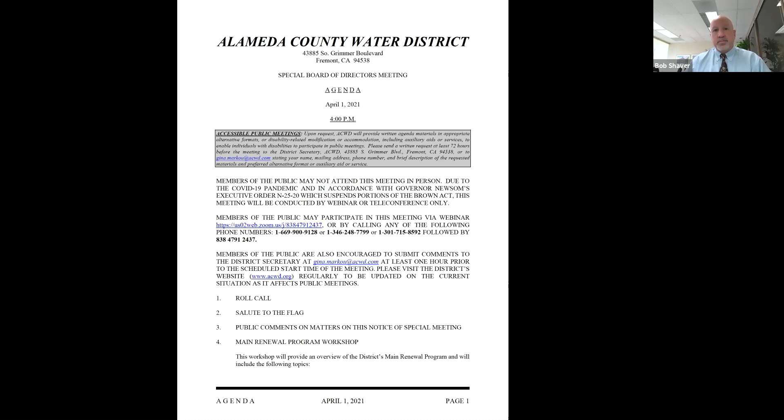Okay, thank you, Mr. Stevenson. And we can dig deeper into this particular topic when we get to those points if needed. Great. Thank you for the question. And thank you to Director Sethi, Mr. Stevenson, and Mr. Shaver for the response. Let me see if there are any other members of the public who wish to make a comment before we move on. Hearing none, I think we can close our public comments and we'll move on to item number 4.

Item number 4 is our main renewal program workshop. This workshop will provide an overview of the district's main renewal program and will include the following topics: an overview of prior analyses of the condition of the water distribution system and recommended improvements, an overview of the process used to prioritize and program main renewal projects into the capital improvement program, a review of programmed and completed water main renewal projects, findings from a survey of Bay Area agencies and their main renewal programs, and a proposed approach towards further progress on the district's main renewal program.

And with that, I will turn it over, I think, to Mr. Shaver or Mr. Stevenson. I'd like to say a couple of things before turning it over to Mr. Stevenson. Number one, I think staff has put together a presentation that should take maybe a little longer than an hour, but I think the board will find it interesting and comprehensive. And I hope you enjoy it and find it informative. And with that, I will turn it over to Mr. Stevenson.

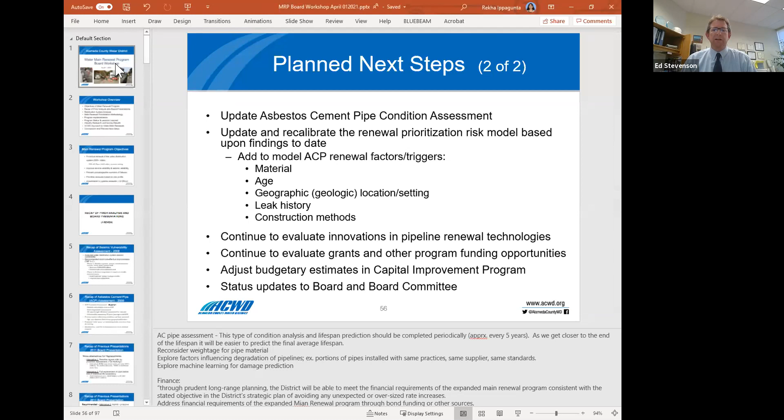So with that, I'd like to introduce Rekha Ippagunta, who is the district's Project Engineering Division Manager. And Rekha will help step us through these topics. And so Rekha, while you're sharing your screen, I will just also note for the board and for the public that the presentation slides that we'll show here this afternoon are posted on the district's website with the agenda for this workshop. Now, there's a lot of material in the presentation, and a lot of that is review, and it's details about projects that are currently underway that the board may already be familiar with. And so Ms. Ippagunta's plan is to only very briefly touch on those topics in order to focus more on the future of the program. But that said, we'd be very happy to go into any detail desired on any of the topics if there are questions from the board or from the public. So with that, I will turn it over to Ms. Ippagunta.

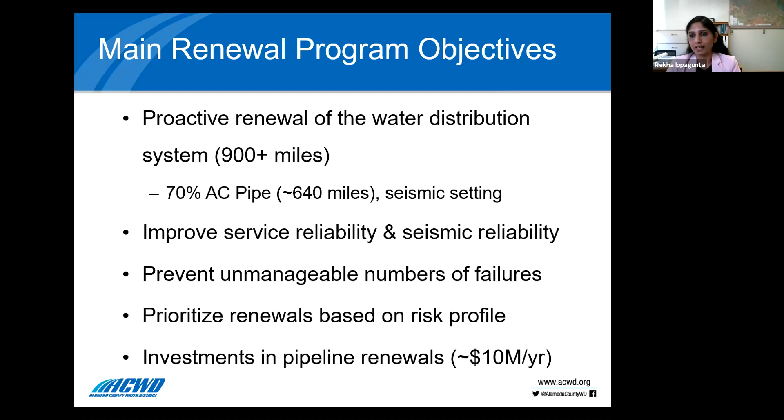So in order to renew and replace 900 miles of pipeline, the core objective of the program is we need a proactive renewal model for replacing or renewing these water distribution mains. And the program would also focus on improving service reliability and seismic reliability. Additional objectives of the program are to prevent an unmanageable number of failures in the future, and the prioritization of the program is based on the risk profile of the pipelines in our distribution system. Currently, we have an objective of $10 million to invest on pipeline renewals. So in the next few slides, I'll go through very briefly the previous analysis that was conducted and the recommendations made to the board.

So back in 2008, the district conducted seismic vulnerability assessments that included all facilities, both production and distribution facilities operated by the district, but I'm only touching on the distribution system analysis and some of the key findings from that report. So the report identified some cost-effective approaches to stabilizing the system and ensuring critical customer service. Those were recommended in 2 phases.

Phase 1 is complete. Most of the fault line crossings have been completed under the phase 1 approach of this report. The project is complete now with multiple fault line crossings within the distribution system. And phase 2 actually focused on the backbone piping in different corridors of the system. And also the report identified the need for a long-term plan for these main renewal projects.

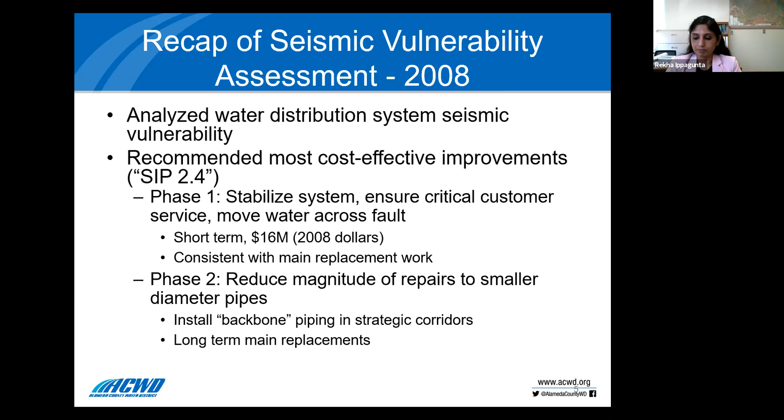And then following the seismic assessments, the district also conducted an asbestos cement pipe assessment in 2009. Exponent was contracted to complete the assessment. They collected samples of our asbestos cement pipe within the distribution system and analyzed and tested them. One of the major reasons the analysis was conducted at that time was to find out the estimated life expectancy of asbestos cement pipe, and also understand the remaining useful life, so that information will help us plan for our program.

Some of the key findings from that report: the pipe strength was still above the requirement for a new pipe per ASTM standards. Some degradation has occurred, but not a lot. And the main outcome was that the life expectancy was estimated to be 75 years for AC pipes. The report also identified other factors that influence the condition and the leak rate of the pipe segments within the system. And the analysis projected an echo wave of failures over time if we do nothing with the existing pipes. Again, this report also identified a need for a comprehensive main renewal program.

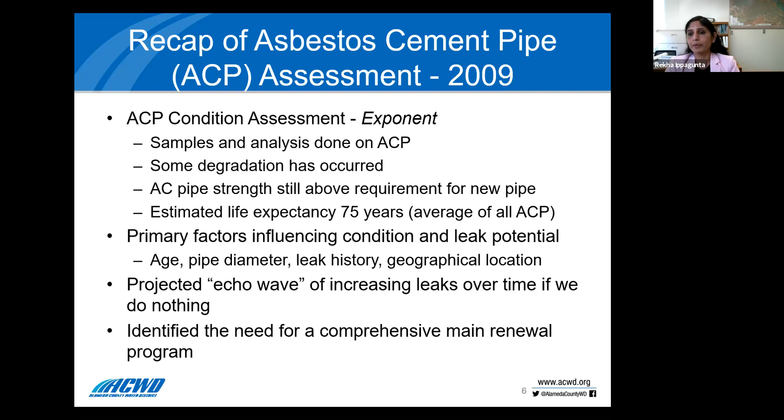Taking those recommendations from the analysis, staff worked on putting together a main renewal program for the district back in 2011. Staff conducted the analysis and came up with 3 alternatives to establish a program for the district. Alternative 1 was reactive repairs, which is basically relying on the repairs and doing nothing. Alternative 2 was on the other end of the spectrum, full replacement of pipeline at the end of statistical life expectancy. Staff recommended a hybrid approach that's a combination of proactive replacements and reactive repairs.

So based on the model recommended in 2011, the objective of the program is to invest $10 million per year. And based on this model, all the AC pipe in the system will be replaced by 2090. In 2014, staff established a main prioritization model for the district to identify the right candidates to focus on as part of the program. As part of that evaluation, we identified about 20 miles of pipeline considered high priority at that time, and then packaged them into projects.

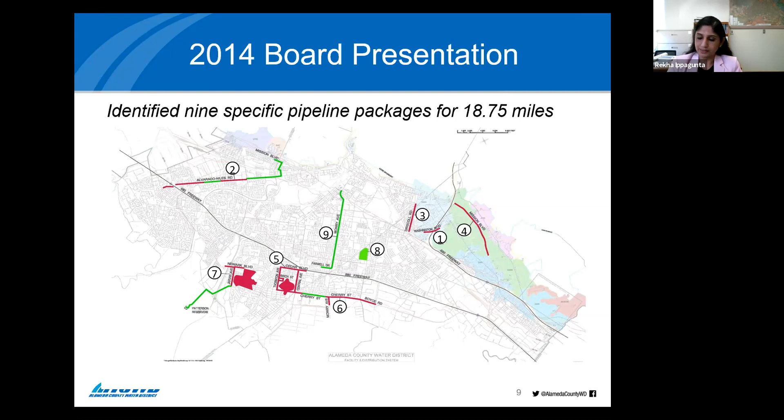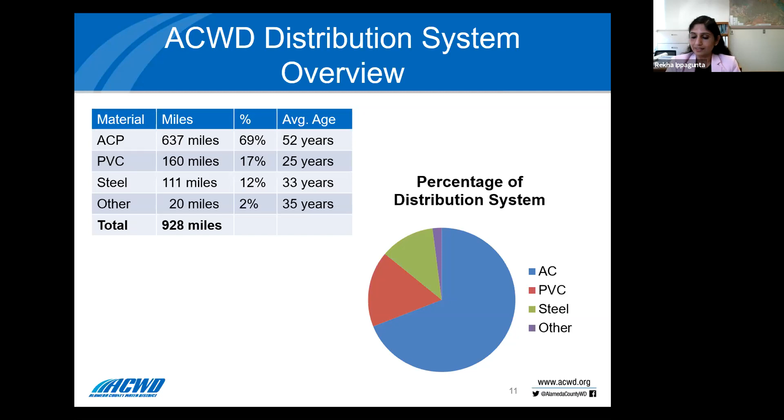So with that background, I will go into the distribution system analysis. Again, this analysis is based on recent information of our distribution system that connects back to what was done 10 years ago. This chart depicts our distribution system. About 2/3 of our system is AC pipe material. The average age of the AC pipe is over 50 years, and the design life is anywhere between 80 to 105 years. AC pipes represent the majority of the pipe leaks in our distribution system. Out of 300 recent pipe failures between 2011 and 2020, 77% were on AC pipes. So the continued focus on AC pipe renewal is appropriate.

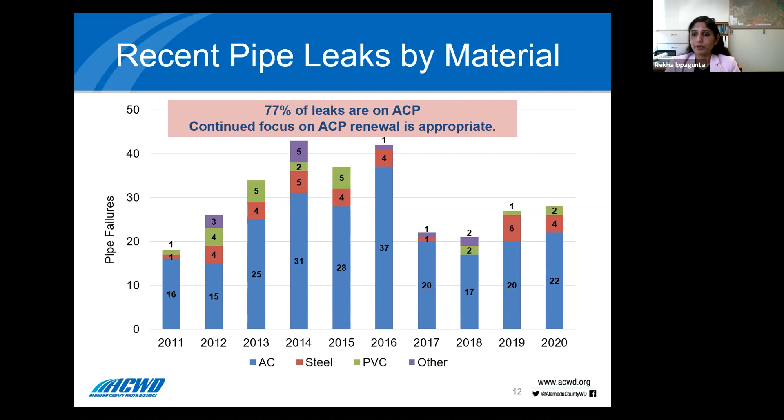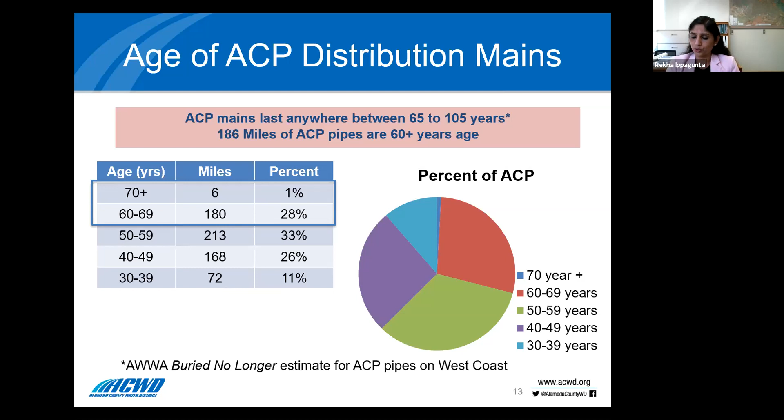So although age is a factor, what we have noticed from this is there are pipelines in certain locations that are younger, in the 40 to 49 years group, that have registered more leaks than the pipes in the 50 to 59 age group. So age is not the only factor, it's only one factor. There are other factors that play a part in the leaking and breaking of pipelines.

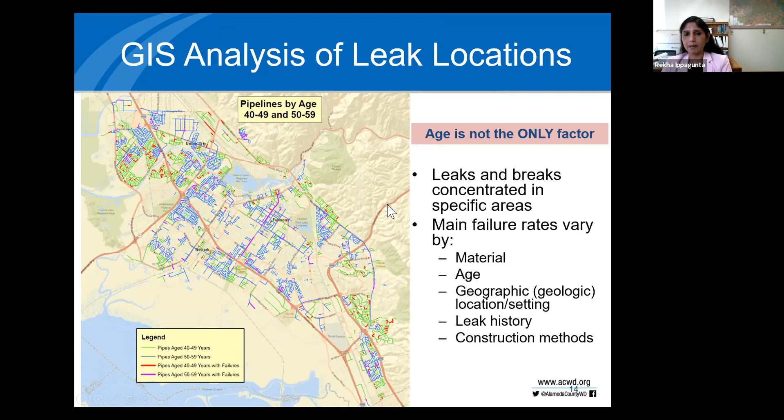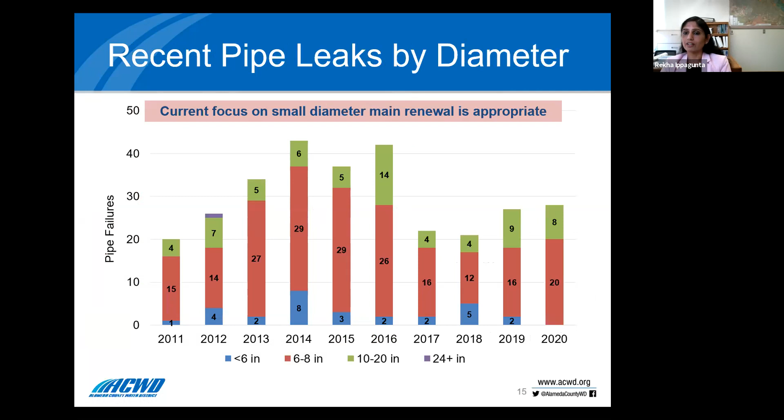So pipelines with a diameter less than 10 inches represent the majority of the pipeline leaks across recent years. This is only showing the information from 2011 to 2020. So the current focus on small diameter main renewal is appropriate.

If there are no leaks registered or recorded, then those pipeline segments were considered in good condition. So based on that evaluation, 92% of the pipelines have no leaks to date.

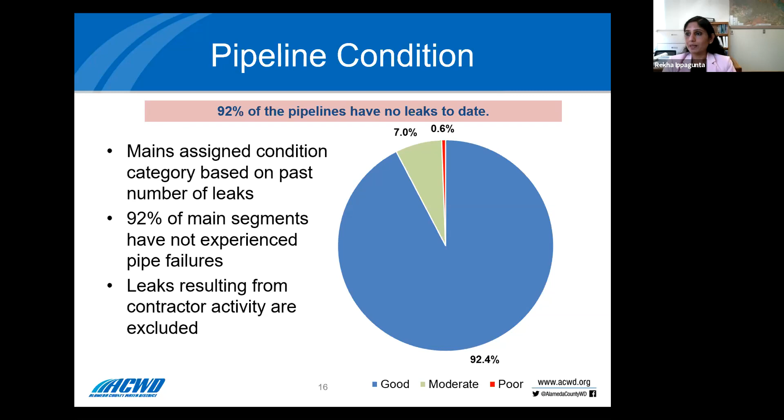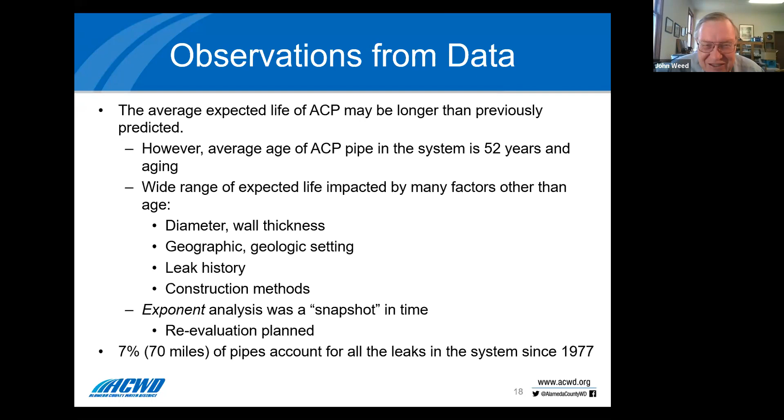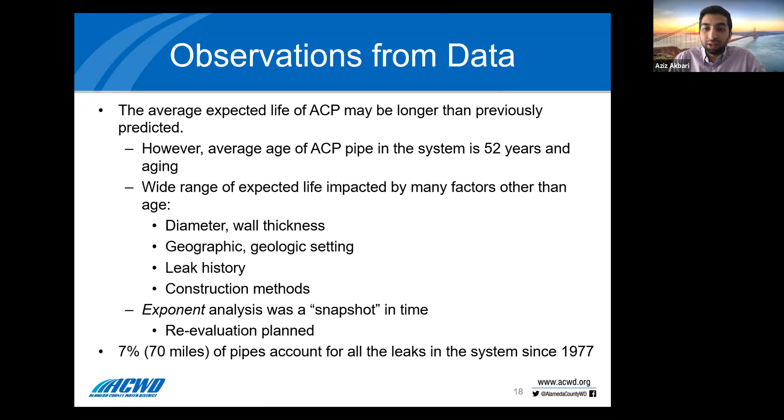All right. Thank you. Do you have any additional questions, Director Weed? I have a bunch of comments, but let us finish the report, and then I'll come back to the longer list. Okay. So please go ahead. I don't want to interrupt you. Any other directors have questions? If not, are there any members of the public who wish to ask a question at this point? Hearing none. Rekha, I'll turn it back to you and we can continue.

Okay, thank you. So let's move on to the next section, which is our risk-based approach to prioritizing our main renewals. And again, I'll go through this very briefly. The board has seen this information in the past. If there are questions, I'll pause and answer those questions.

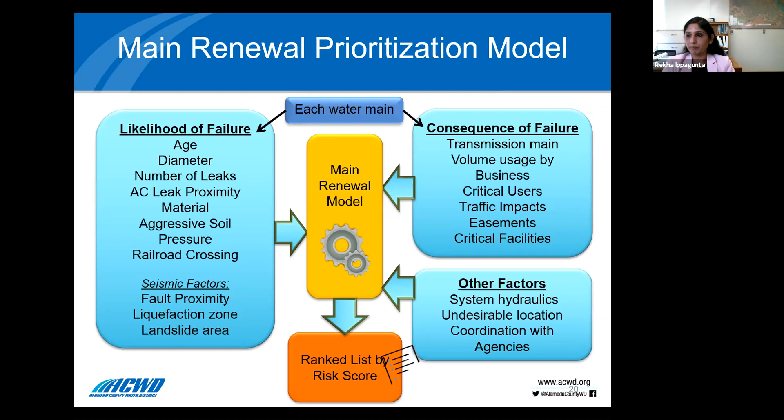So we go through the prioritization or ranking of our pipelines and the selection of the pipelines for appropriate renewals in a three-step process. So the first step is we take all the segments in our distribution system that are on our GIS and then rank them based on relative risk. So each segment of pipeline is evaluated for likelihood of failure, consequence of failure, and other seismic factors that include fault proximity, liquefaction, and landslide. So once all these factors are applied at different weightage, we have a ranked list of all the pipeline segments in our distribution system.

And in the second step, we run our hydraulic model to understand any capacity constraints within the system, and the pipelines that exhibit some sort of capacity constraints or low pressure issues or any other concerns would be identified and then added to our complete list of ranked pipeline segments. And then once we identify the top 1% of pipelines that are ranked based on likelihood of failure and consequence of failure and other factors, those are mapped on a plot, and then we look for potential projects by consolidating different pipe segments into projects.

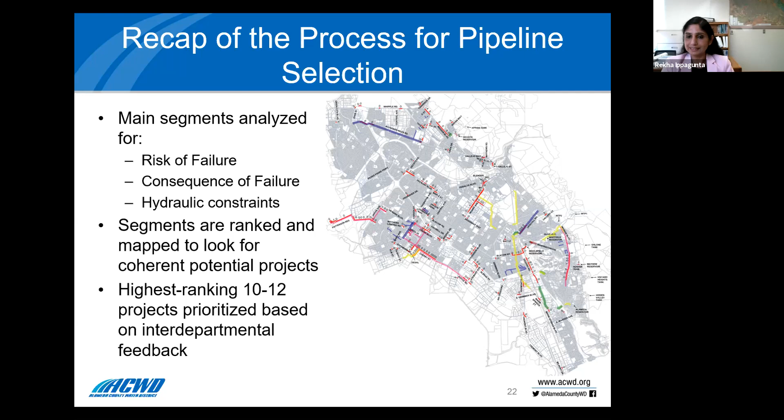So once we have these projects, we'll take the top 10 or 12 projects and then have an interdepartmental meeting and receive interdepartmental feedback and apply our institutional knowledge, and then identify top projects that we should be focusing on, and we'll incorporate that into our CIP process. So that's pretty much the selection of the pipelines and identifying the right projects to focus on. And then once the right projects are identified, we'll go through the detailed design, permitting, bidding, and construction, just like any other CIP project.

So we also have a number of tools in our toolbox for renewal of these mains. Some of them are identified here. Slip lining an existing main is one option, or we can replace in the same trench or replace in a separate trench, and also cured in place lining is another option. So once the pipelines are selected, we'll evaluate the needs of those pipelines and then apply the right tool for replacement or renewal.

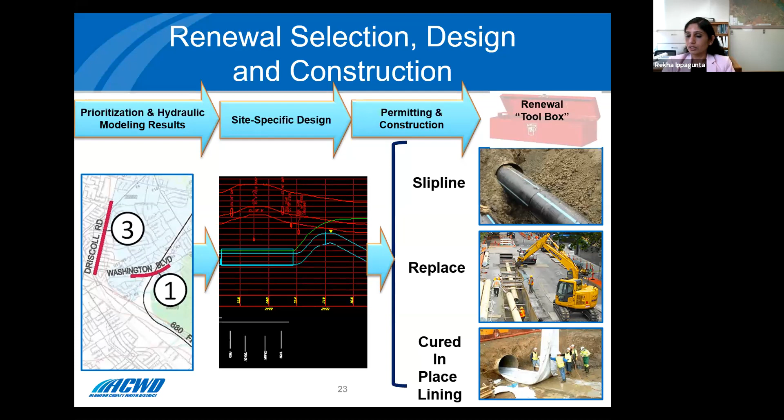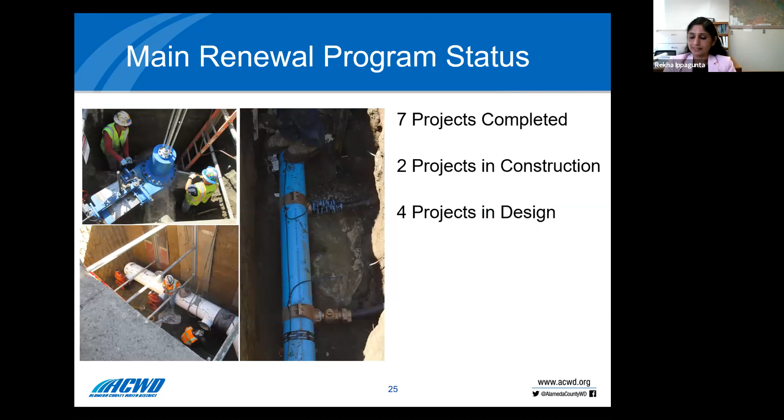So the next few slides focus on the implementation status. I'll quickly go through the projects that were completed and that are currently in progress. The board has seen this information a few times before, so I will be briefly touching on some of these projects. But feel free to stop me if you have any questions. So far, we have completed 7 projects since we initiated this main renewal program. And currently we have 2 projects in construction. One is a seismic improvement project and one is a small diameter main renewal. And we do have several projects in design. So this is a long list of completed projects. The key takeaway here is we have completed about 5.5 miles of pipeline so far.

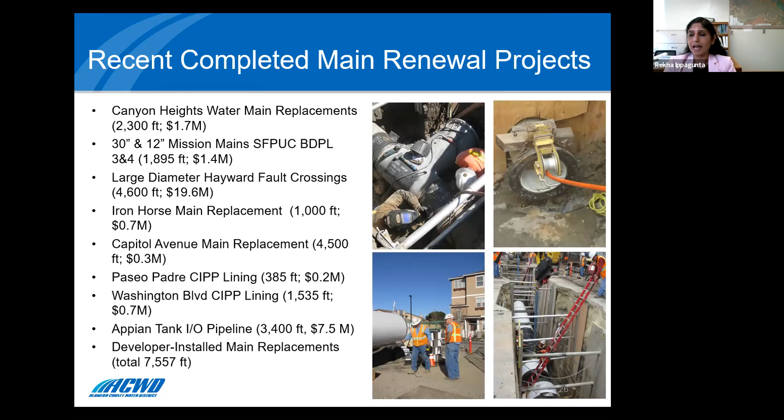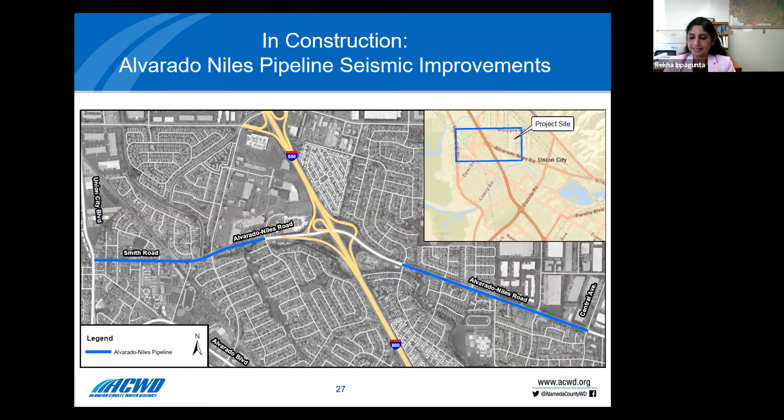And this is the Alvarado Niles seismic improvement project. Phase 1 is currently in construction. The board is very well aware of the project that is currently in construction, and we also have a second phase of the project that is currently in design. Phase 1 is on the west side of 880, so on Smith Road, and Alvarado Niles is the one that is currently in construction. It's 1.7 miles of pipeline. This includes not just the main trunk main installation, it also includes services, fire hydrants, and a complete renewal of our water system in that area, including installation of a cathodic protection system. And also we have about 21 connections that we'll be making to our existing water system.

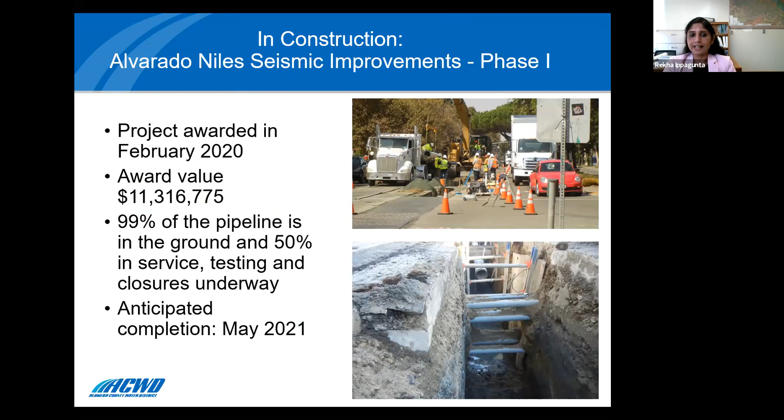So this is an $11.3 million construction contract. 99% of the pipeline is in ground, and about 50% of the pipeline is already in service. The project is anticipated to be complete by end of May 2021.

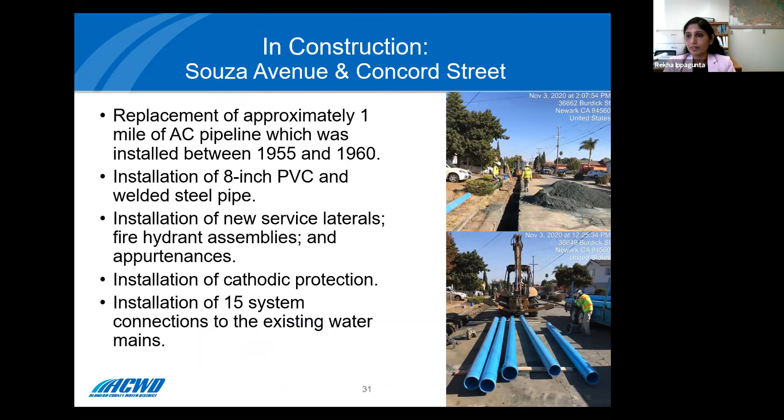This is another project that is in construction right now. This is a small diameter main renewal project in Newark, in a residential area on Concord Street and Souza Avenue. This is about 1 mile of pipeline renewal of 8-inch PVC. And this again includes installation of the main as well as service laterals, fire hydrants, and valves and appurtenances. The project was awarded in May 2020, and this is a $3.2 million contract. 50% of the pipeline is in ground. We encountered some unforeseen conditions during construction. The project is anticipated to resume construction next week, and it's expected to be complete by June 2021.

And Alvarado Niles phase 2. Phase 1 is the one that is currently in construction. We also have phase 2 currently in design. This has some special considerations in addition to what we have in phase 1, which include a creek crossing and a railroad crossing. The construction estimate of this project is going to be slightly higher than phase 1. It's estimated to be a $17 million construction project, and construction is scheduled for 22-23.

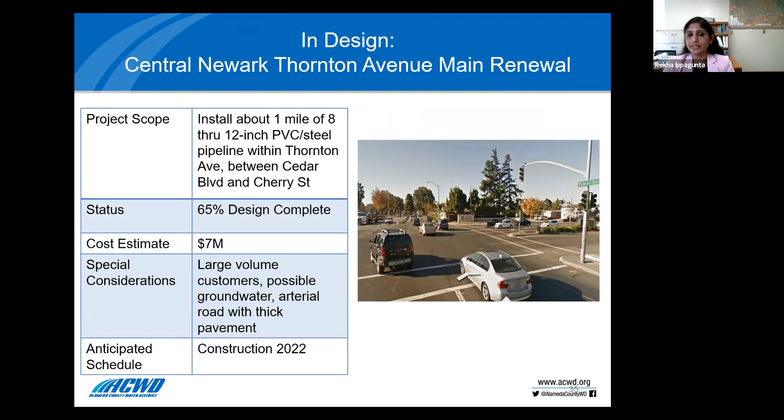And another project that's currently in design, about 65% design complete. This is Central Newark, Thornton Avenue main replacement. This is phase 1 of the project, and phase 2 is included in our CIP.

And we also have a small diameter main renewal project that includes multiple pipeline segments in the 3 cities. Currently, the project segments in the City of Fremont that add up to about 3 miles of pipeline are on hold because of certain requirements from the City of Fremont related to removing the pipes from the ground after removing them from service. So we have been in discussions with the city.

Once we resolve those permitting requirements related to AC pipe removal, we'll resume the design on the City of Fremont pipe segments. However, Newark and Union City pipe segments are continuing, and the design is currently at 65%. And we also have additional projects that we are collaborating with the City of Newark on, a couple of small diameter pipeline segments.

So with that, I'd like to touch on what we have learned so far in the implementation of this program. Rekha, can I just jump in and see if there's any questions? Yes, of course. Are there any directors who have questions?

I'd just like to make a quick comment. Living as close as I do to the Alvarado pipeline, we have dodged a huge bullet because of the school closures. However, the schools are most likely going to open back up someday. I see Fremont is looking to not do it till this fall. But looking at the projects, we're going to have Driscoll and most likely Alvarado Niles in process at the same time.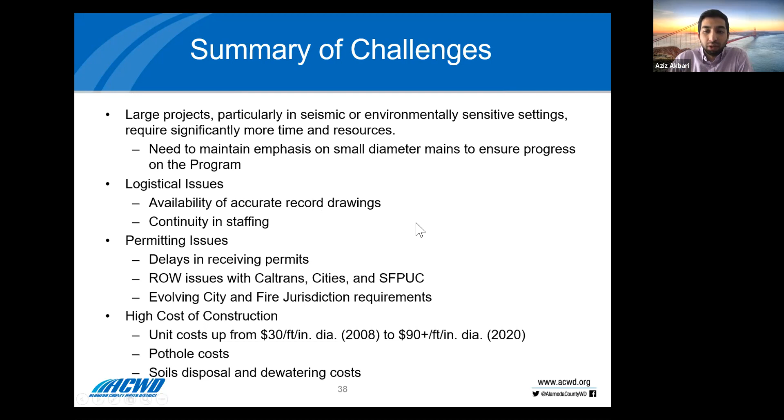Thank you, Director Gunther. I actually had one question on slide 32, which was Souza Avenue and Concord Street. I believe you made a comment that sounded like maybe the project ran into some issues and was on hold currently and will be picked up again next week. Can you just expand on what issues we ran into and what lessons we learned to try and avoid that situation next time? Yes, actually, this is sometime late January.

We have encountered groundwater, and actually the potholing that was done during design, and also the potholing that was done before starting construction by the contractor, didn't reveal that information, because at that time the design was based on a shallow depth pipeline, which is less than 5 feet deep. So groundwater was not identified as an issue during design or when we started construction.

But because of some unforeseen conflicts, pipe conflicts with other utilities, we had to redesign certain segments on the fly. So the redesign required us to go deeper than 5 feet, the originally anticipated depth. So now we had to go about 7 feet deep, and that's when the contractors encountered groundwater issues. So the project was stopped at that time for those pipeline segments.

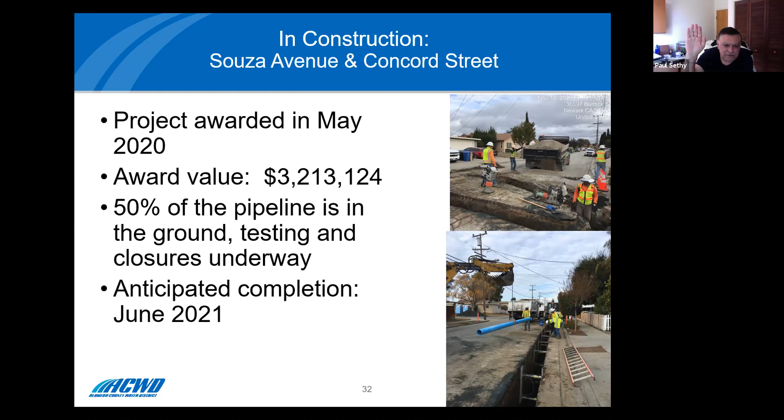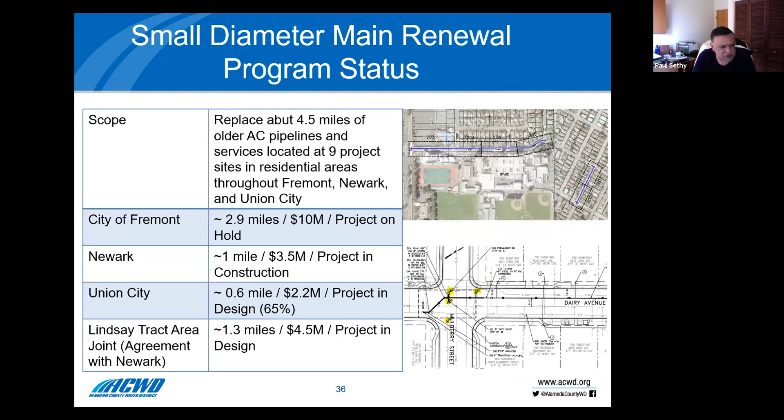Got it. Okay, thank you. Director Sethy here. Yes. So back to the slide that you were on with costs there. I think it was slide 30, yeah, 38. There we go. So I just want to offer a little bit of feedback here. I appreciate all the work that staff is doing, all the continuing work that we've done on projects, but I just want to offer a little bit of a retrospective here.

If we go back a dozen years, we were looking at the unit costs that you mentioned here, and now it's tripled from that level. We, in my opinion, arbitrarily chose a number as a board based on input from staff that we were going to try to complete $10 million a year of pipeline renewal, which amounted to 5 to 10 miles of pipeline every year. But that goes back a decade ago. Now we're dealing with a different cost metric in our universe. And I don't know whether we're being realistic about the future financing costs of the projects that we have in our pipeline. Sorry, pardon the pun there.

And I'm also going to be a little bit critical of staff here because we as directors are responsible for setting the rates for our customers. And we dramatically increased our rates 4 years ago in anticipation of doing a lot of main renewal work. And what has happened is that if you look at our reserves, we're building up tens of millions of dollars in reserves because we're not getting sufficient work done.

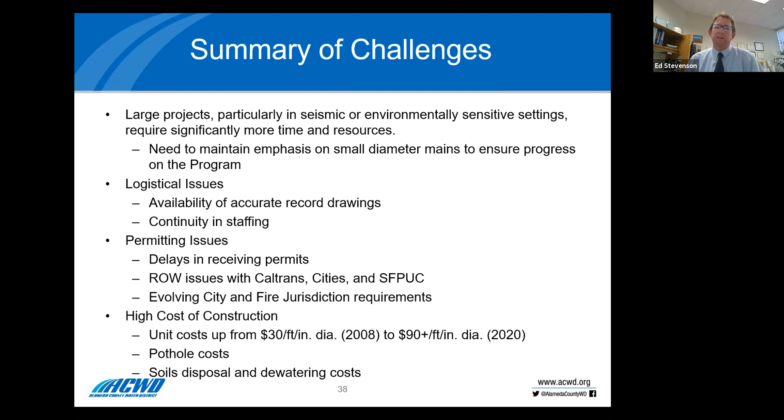The other thing you mentioned in terms of accelerating the program, and that's really a key objective of what staff is working to do. Yes, there are big dollars involved, and one of the things we've been working on is trying to show in the CIP what those dollars will translate to in the future. So we're trying to be responsible and proactive from that standpoint. This presentation, this information is designed to kind of set that background so that we're not relying on those same expectations that we had in mind many years ago, but rather we're making a more realistic assessment of what the cost of the program is and then what our future would look like.

In terms of ramping up, I'm sure you have seen that is our approach. We do intend to dedicate additional resources to this over time. There will obviously be costs of that. We want to ensure that the CIP reflects that. And our intent is to do that in a responsible way that's matching that increase in production of the program to all of the factors involved, including maximizing the economic life of the existing system. So those are some issues that we'll touch on as we move a little bit more forward, but we definitely hear your sentiment there and do not disagree.

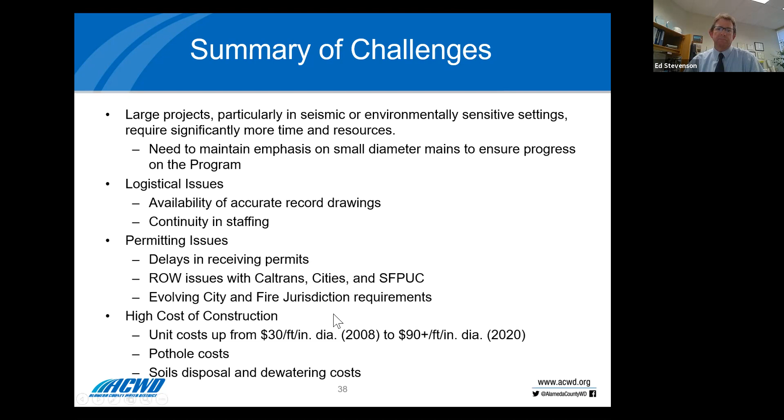Okay, thank you, Mr. Stevenson. Adding on to that, in addition to economic challenges, this is to set the stage for what the economic challenges are and how do we reset the program. We're also thinking about how do we achieve this accelerated program or ramp up, how do we do that? So that's something that we are also thinking about, maybe having a dedicated group of engineers. Something has to change to make progress on this project and be successful. Thanks for your input on that.

And just summarizing the challenges, this would be a good connection to why some of these projects take longer. So far, we have been focusing on some large diameter projects in seismic setting and with some complex environmental issues. So those projects take a lot of time, a lot of resources. And if you observe over the last 6-7 years, majority of our projects are for some of these large mains. I think there is a need to emphasize that we also need to focus on small diameter mains to ensure we're making the right progress on the program.

And we also had some logistical issues related to the record drawings of the utilities. And continuity in staffing has been a challenge. In the last 9 years, we have lost 13 people in engineering, project engineering. So some of these issues are contributing to that. And then permitting issues, we have encountered several delays in receiving encroachment permits on the projects that are in design or the ones that we have been working with the cities for several months or years in some cases. And a lot of these pipelines are in the jurisdiction of SFPUC, Caltrans. So there are other agreements that are necessary to go through some of those right-of-way issues.

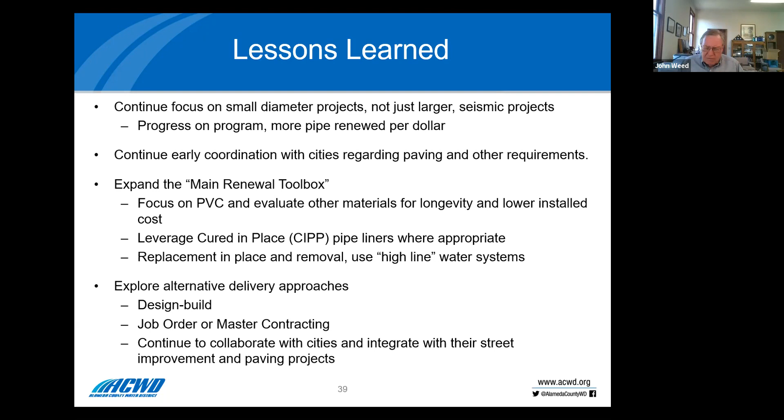Ed, you just mentioned that there's particular constraints to where the liners can be used. Can you just briefly comment on the constraints on where we could actually make use of those liners? And from a cost perspective, if I recall correctly, we used the liners for the renewal at the corner of, I think it was Fremont and Grimmer. Is that correct? That was actually at Washington and Paseo. Yeah, sorry. So we did a couple of long segments of pipe in those areas.

So there's lots of advantages, and we can talk about those, but some of the constraints: it's great for ACP, the main material we're focusing on so far in this discussion, but it's not that great for steel and other types of materials that you'd be welding on for things like flanges and service connections and weldolets, because you're essentially lining this steel pipe with a plastic, right? So it's not great if you need to be able to weld onto that pipe, which is very common for pipe materials other than say PVC or ACP. So a constraint is the host pipe material. It can be done, it just definitely changes the way you would do maintenance and other work on the pipe.

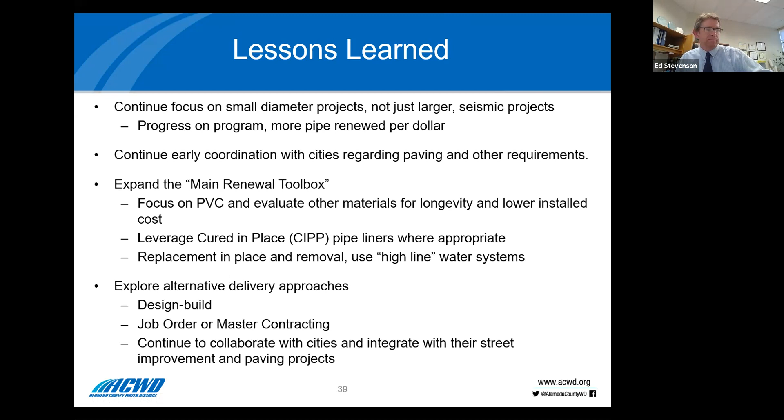Hey, Ed, could I do a process check here and look at how much time to finish this presentation? We have a closed door session too. Yeah, we have some chunky stuff coming up. So what we'll try and do is step quickly through the survey, which is the next section. You've had an opportunity to take a look at the material. You'll quickly see the findings that we have here. And then we'd like to take a look at our overall objectives. And that will start on slide 50. So Reka, do you mind stepping quickly through the next section? Yes, I'll do that. I know we have about 15 or 14 slides. I'll go through the survey information real quick and then get to our approach.

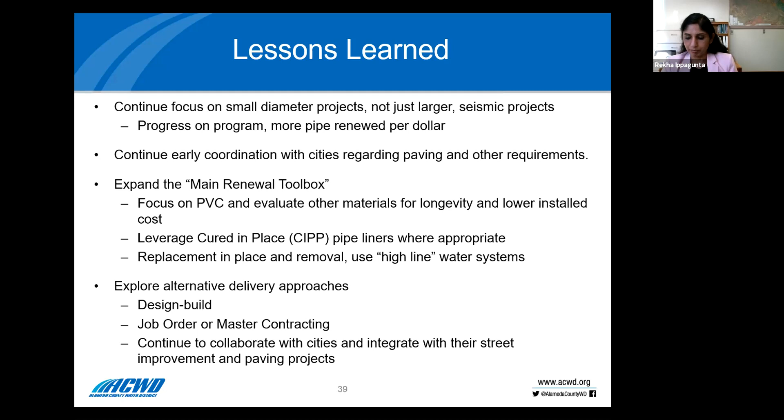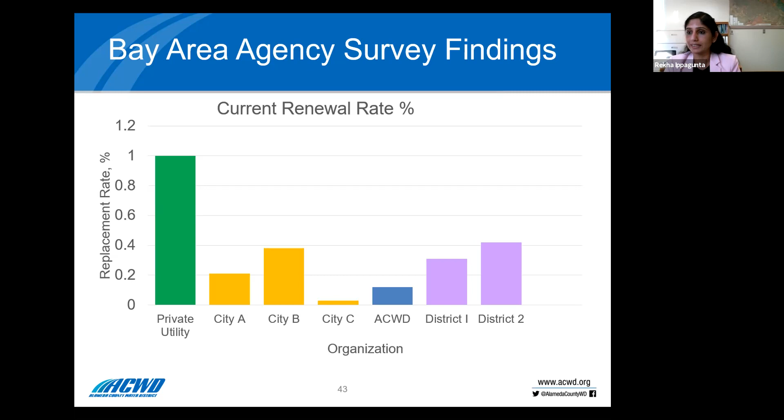And then this is a slide showing the current renewal rate by other utilities. The private utility that responded to the survey is maintaining a 1% replacement rate. But if you look at the agencies and municipalities, most of the Bay Area utilities are under 0.5%. Just for the benefit of the public, when I say 1% replacement rate, it means that it takes 100 years to replace the entire system. And when I say 0.5%, it takes 200 years. So it goes in the same proportion.

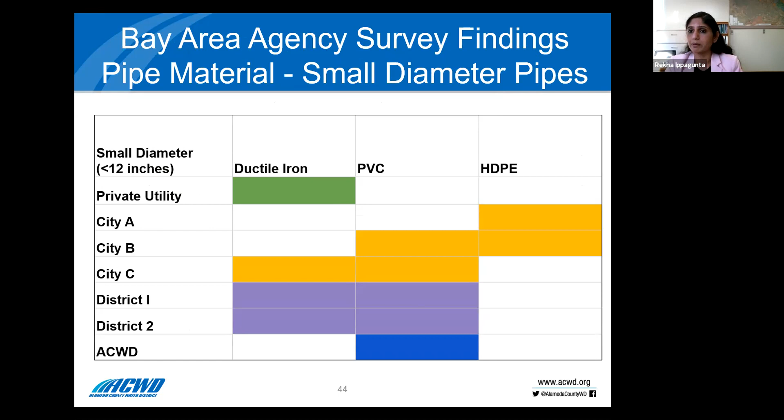And then this is another piece of information that we gathered in terms of what pipe material other utilities are using. And we found out that many utilities are using ductile iron, PVC, HDPE. These are the standard materials for small diameter pipelines. Whereas when it comes to large diameter pipelines, most utilities are again relying on ductile iron, PVC, HDPE. And steel is a material for some utilities. What we have found out is that's generally used for large transmission mains. Otherwise, many utilities have been successful in using ductile iron, PVC, HDPE for large distribution mains.

And we also surveyed on the project delivery methods. 6 utilities that we have surveyed are utilizing a traditional design bid build approach, similar to what ACWD is doing. There is 1 utility that's using their own construction crews. And then there is 1 utility that is also using a design build approach. And another utility is piloting a design build approach just for the emergency replacements, with a plan to go into a design build approach for future replacements or renewals.

And then there's a question on pipeline renewals or rehabilitation methods that other utilities are using. Two of the utilities responded that they are using some sort of pipe rehab methods like CIPP lining, structural lining, or pipe bursting. It's not really an option for AC pipes, but other utilities, when they have other pipe material, successfully use pipe bursting and slip lining if capacity is not a constraint.

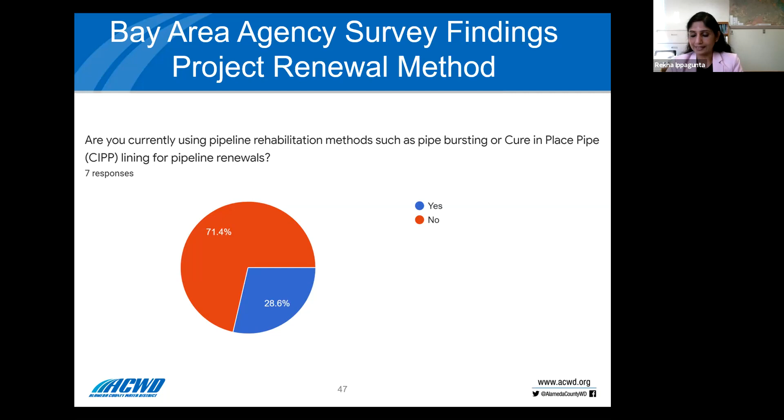One of the two utilities that responded that they have significantly been using the pipe rehab renewal method is a wholesaler, so the majority of their pipelines are transmission mains with an average size of 48 or 90-inch pipe. So in those cases, it makes total sense to heavily rely on rehab methods.

So summary of the findings: the average replacement rate of the Bay Area agencies, that includes both municipalities and special districts, is in the range of 0.25%. And all the utilities are targeting to go up to 1%, but none of them are really achieving that rate. They are currently achieving less than 0.5%, and all the utilities that we spoke to are planning to ramp up over time. In terms of contracting approaches, as I mentioned, master contracting has successfully been used by several utilities, and in-house construction crews is also something that we found has been successful.

And all agencies are experiencing similar challenges related to implementation of their programs: accuracy of record drawings for utilities, which is a common theme that we have identified, and paving restoration requirements as part of encroachment permits. Most of the utilities we spoke to are encountering these issues. And an increase in material and construction cost; we are not the only ones facing this. And then summarizing that, most utilities are exploring other pipe materials and considering PVC and HDPE for large diameter pipe renewals.

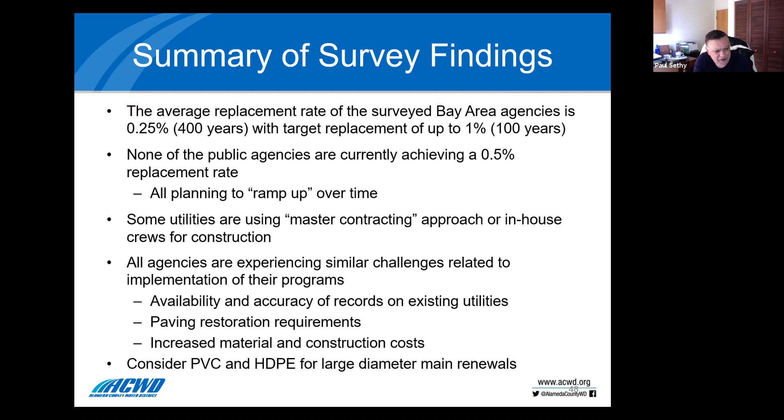We do have some information that we are proposing as part of our approach going forward to water main renewals. Let's see if that answers your question here. And again, in this approach we're not using the benchmark survey as direction for us to take this program forward. It's just understanding where other utilities are and what challenges they're facing, and if there are any industry best practices that we can learn from them. So that was the main intent of the survey, and we did learn a lot.

In addition to these Bay Area agency surveys, we also reviewed the nationwide reports, the recent America's Infrastructure Report Card released in 2021 by the American Society of Civil Engineers. The findings from the nationwide report and findings from the Bay Area survey agencies are all in line with what we have been thinking, and we formulated the approach based on the needs of the district. Yeah, well, we know everybody is behind schedule. Let's see if we can become the standard bearer for the industry in showing how it's done right.

Yeah, and I appreciate that, Director Sethy. And you'll see that our approach involves reassessing this program. I understand that you're seeing a need for additional urgency. We do always want to consider the remaining economic life in the current system and try and balance that, because right now our objectives have been based upon balancing that economic objective. If there are other objectives, then it's helpful for us to understand. But you'll see our approach and how we're essentially doing a bit of adaptive management as we go over time.

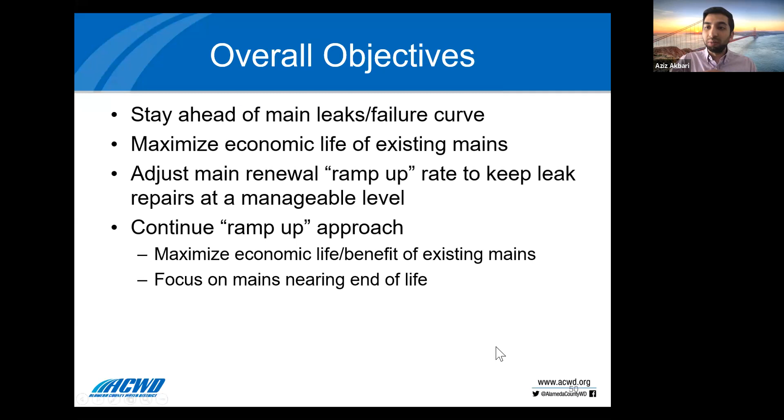Thank you, Director Weed, for these comments and suggestions. Moving on to the next section of the presentation. I'm going to jump in. I believe Mr. Kellier has a question from the public. Well, it's more of a comment, or maybe it's a question.

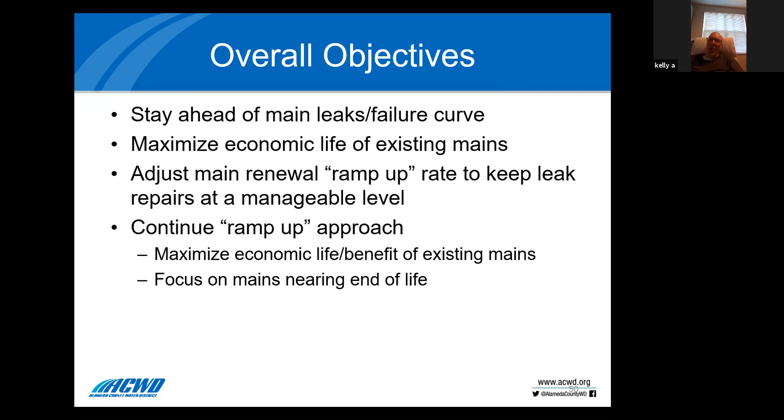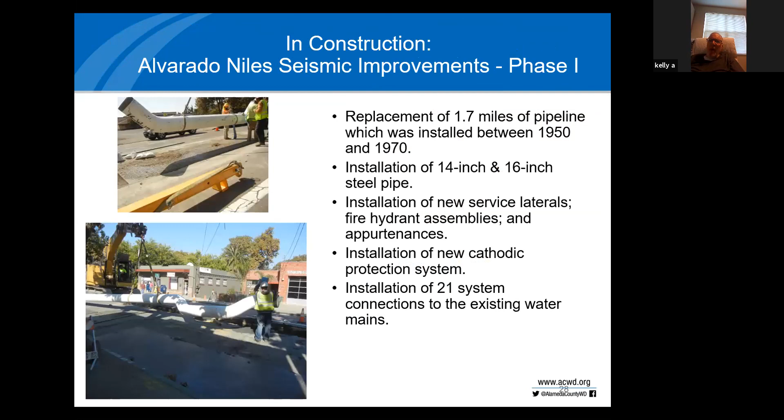And number two, it seems like there's very few leaks, like 25, 30 leaks a year. Maybe there's actually 30,000 leaks a year, but you're not counting little drips. How do you define a leak? Maybe this only counts the real leaks, and you're not counting all the tiny little leaks that don't really matter.

Also, question number three, what percentage of your water leaks out of the pipes? I've heard it's a surprisingly high percentage across America. I'm wondering what your guess is for your leakage. Thanks.

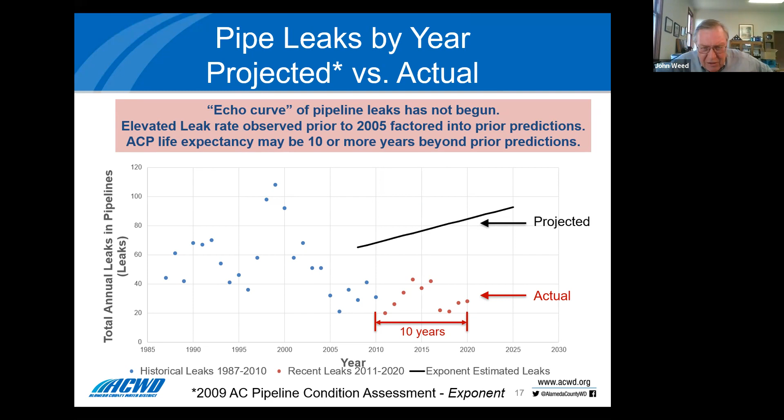Director Gunther here. I don't remember those same statistics, Director Weed, and I think operations would have to be here to comment on that. But I think there's some issues there. Yeah, I can comment on that.

We did staff up with an extra crew or two. It was before my time as general manager, to proactively address service line failures that we were experiencing with polybutylene service lines. I think what happened is we sort of got ahead of it a little bit, and we certainly have enough work to keep our utility workers busy. And they've been repurposed, and we've been much better at doing our water main flushing or cleaning program.

We've done a better job doing our valve exercising. And when we have those big issues, it's been really, really helpful to have utility workers that are able to deal with it. But everybody is busy, and if we benchmark the number of utility workers that we have with other agencies, I am pretty certain that we will show up fine in terms of the number of resources we have for our size agency. I think it's very appropriate.

With that, I would suggest that we go back to the presentation and power through the last 15 slides or so, and then open it up for Q&A again.

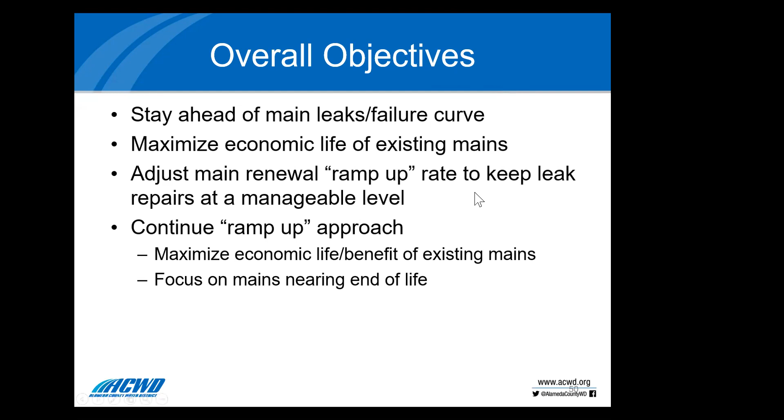Hey, I just want to share something with the audience. There's somebody with some music or audio equipment that is disturbing the entire conversation here. Issue resolved. So Ed, Rekha, can we kind of continue where we were leaving off? If that's okay, President Akbari? Yes, absolutely. Okay, thank you.

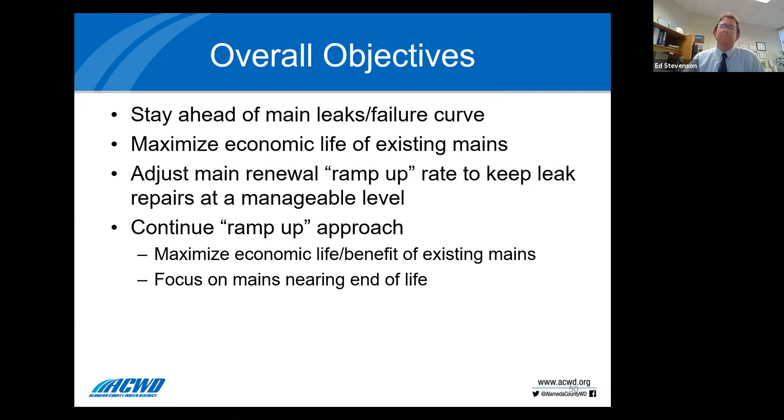Thank you. So this is the last section of the presentation. These are our overall objectives. The objectives remain the same, and our strategy and our approach is slightly modified. So that's what we'll go through in the next few slides. Just touching on these high-level objectives: the main objective is to stay ahead of our failure curve and maximize the economic life of our existing water mains. So the approach is to adjust our ramp-up rate to keep our leak repairs at a manageable level, considering our historic highs, and again, focusing on those mains that are nearing the end of useful life.

So this is a slide that illustrates the ramp-up approach going forward, and just a little background to understand what's going on in this slide. We have red, green, and orange bars. The red is the projected leaks, and the projected leaks on this chart were calculated using the Exponent model. They have provided a formula for predicting future normalized leaks. Using that model, we have projected the leaks in the next few decades.

And then the green line represents the projected leaks with ramp-up: while we simultaneously ramp up our main pipeline renewals, how the leak rate would change. And then the orange bars indicate our actual ramp-up schedule in miles per year. For example, in 2030, we are looking at replacing a little less than 4 miles per year. So that's how we read this slide, just to give you that background.

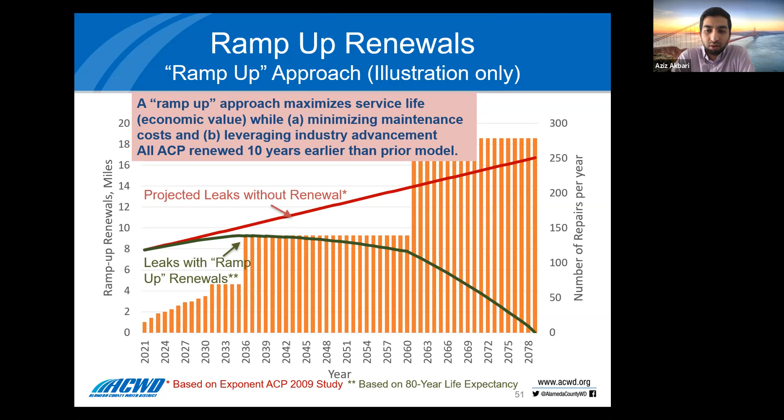So this particular analysis was not really focusing on seismic vulnerabilities. This is related to replacing or renewing our old pipe with new pipe. But the program also includes seismic improvements to our projects or to the main renewals. So actually, we didn't focus too much on the seismic aspect of the pipeline renewals, and the presented approach is to sustain the renewal rate and make sure we are able to get through the entire renewal of our AC pipes before we experience a major number of leaks or failures under normal circumstances because of aging pipeline and the other factors impacting the repairs.

However, if there is a seismic event, the number of leaks, the number of failures, that's a different analysis. The number of repairs that would be necessary after a seismic event is going to be exponentially higher than what we are seeing on this slide, because this didn't incorporate a seismic event.

Yeah, and I'll just quickly add that what you're seeing on the left y-axis here is the number of miles of pipe. But remember, we didn't spend a lot of time on it, but there's this prioritization process and it's risk-based. And part of the assessment of the risk of every single segment of the pipe factors in seismic risk. So if there was a major seismic event, we know we're going to lose a lot of water mains. But part of the program involves assessing the risk and prioritizing based upon risk. And so that includes seismic.

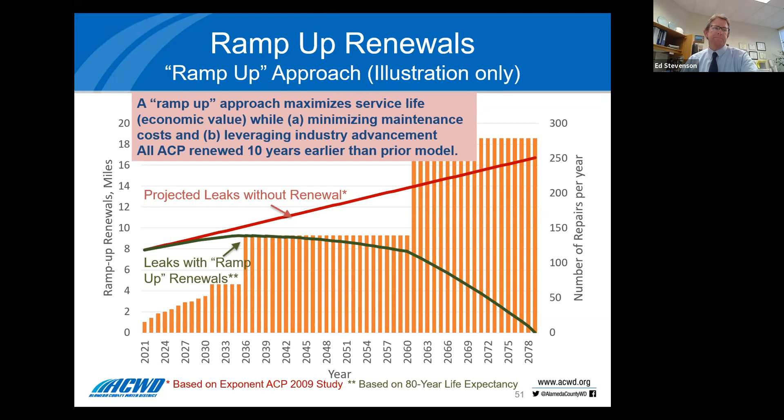So to summarize what we are seeing on this slide, this justifies a ramp-up approach to maximize the service life or the economic value of the pipeline by minimizing our maintenance costs. And then also it will give us time in the next few years to leverage industry advancement in the renewal technology. And then with this model, our ACP pipes will be renewed 10 years earlier than the prior model that was presented earlier based on our previous board presentations.

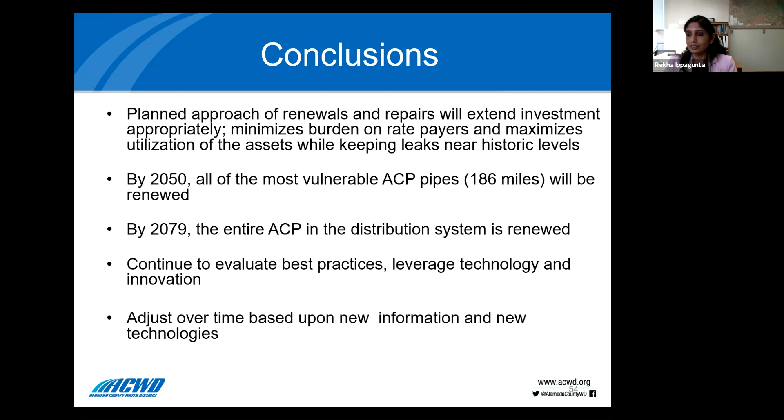Again, we'll continue to evaluate the best practices and leverage technology and innovation and adjust our program, adjust our replacement rate over time. And as we have new information on that, we'll be sharing that and adjusting that based on our program requirements. So the next couple of slides, I'll touch on our planned next steps. This is mostly the near-term next steps for the program.

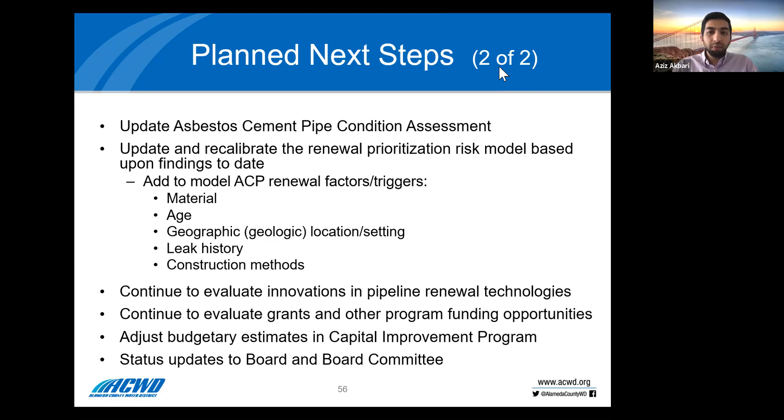If I understood your question correctly, in the first decade, 2021 to 2030, the pipelines that we have identified are based on our risk profile, and also would include some of the projects that are based on the pipeline condition analysis. Would there be ones that right now, because of a budget constraint or an engineering resources constraint, have been pushed into 2031 to 2040, but should be prioritized sooner if we had the money?

Yes, we know that the resources would have to be ramped up in future, but when we put this plan together, this didn't include resource constraints as such. This is based on what we need to do so that we are not going with a premature replacement of pipelines before they reach the end of their useful life, and then focus on the ones that are necessary to focus on now. So that's the main criteria that we have used when we put this plan together.

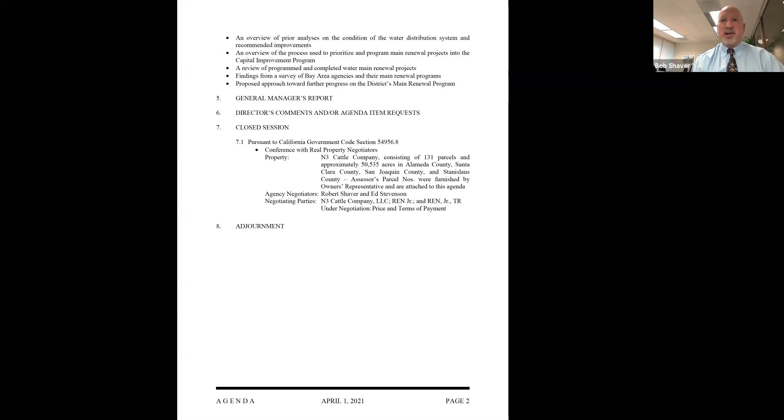So I'm just offering that. We don't have to do it in this board meeting. We'll go to the closed session, but like I said, there are elements that were expressed that can all be weaved together. Okay. Thank you, Mr. Shaver. With that, we will conclude item number 4 on tonight's agenda and move on to item number 5, general managers reports. Are there any general managers reports? None this evening, unless any staff has anything newsworthy that is breaking now that I'm not aware of. Okay, no general manager report items then.

Thank you. Great. Let us move on to item number 6, director's comments and/or agenda item requests. I'll open it up to the board. None from me except for a short break before we go into closed session. Absolutely. Thank you. Hearing nothing else, I just want to express my appreciation for staff, particularly Ms. Ippagunta and Mr. Stevenson for tonight's presentation. We had a lot of discussion, but we're always appreciative of the work that staff puts in. And thank you for standing in the line of fire, Reka.

We will then move on to item number 7, closed session. And I will try and read us into closed session. Item 7.1, pursuant to California Government Code, Section 54956.8, conference with real property negotiators. The property is the N3 Cattle Company, consisting of 131 parcels and approximately 50,535 acres in Alameda County, Santa Clara County, San Joaquin County, and Stanislaus County. Assessor's parcel numbers were furnished by the owner's representative and are attached to the agenda. The agency negotiators are Robert Shaver and Ed Stevenson, and the negotiating parties are the N3 Cattle Company, LLC, REN Jr. and REN Jr. Trust. Under negotiation are the price and terms of payment. And with that, we'll move into closed session and then we'll take a short break.

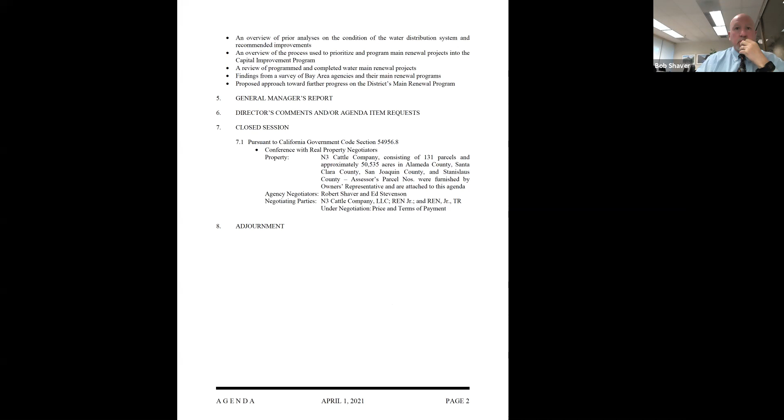Hey, Andy, are we supposed to leave the meeting or wait till you have us join? Andy, you're on mute. Sorry, I just caught that. I believe once I open the room, you click on join and it will take you right to it. So I'm clicking on, I haven't got to your name yet. There you go. So now you are ready to go. Okay. Do you see the join? All right, Andy, good job.

Now. Wonderful. All right, it is 7:54 p.m. We have just convened into open session. We've concluded item 7.1. Pursuant to California Government Code, Section 54956.8, conference with real property negotiators. Property is the N3 Cattle Company, consisting of 131 parcels and approximately 50,535 acres in Alameda County, Santa Clara County, San Joaquin County, and Stanislaus County. Assessor's parcel numbers were furnished by the owner's representative and are attached to the agenda.